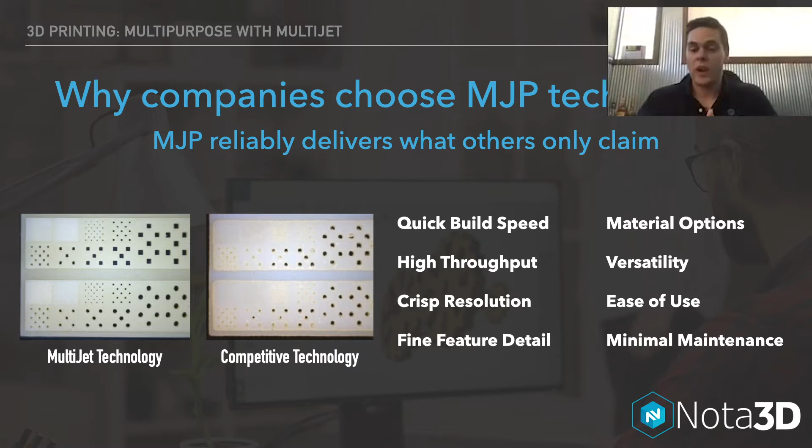Why do companies like to use MJP? Well, it's mainly because of the wide range of benefits that it provides. There's many reasons why companies would choose to use MJP, and if you were to ask our customers, the most common ones we hear back are extremely high resolution and detail, crisp corners and edges. A really big one is the no-maintenance print heads, easy material changeovers that don't require excessive purges and wasted material, and not to mention the wide range of materials available.

Based on having such a broad range of capabilities, MJP is usually a pretty good fit for a broad range of industries. Here to help me talk through some of the various industries we've helped over the years is Tom Rohrbeck. He's a longtime veteran of the additive manufacturing industry, having started his career with 3D Systems back in 1986. Over the years we've worked with pretty much any industry you can think of, but here's a few key ones we're going to dive into today. Tom, you with us? Sure, sure.

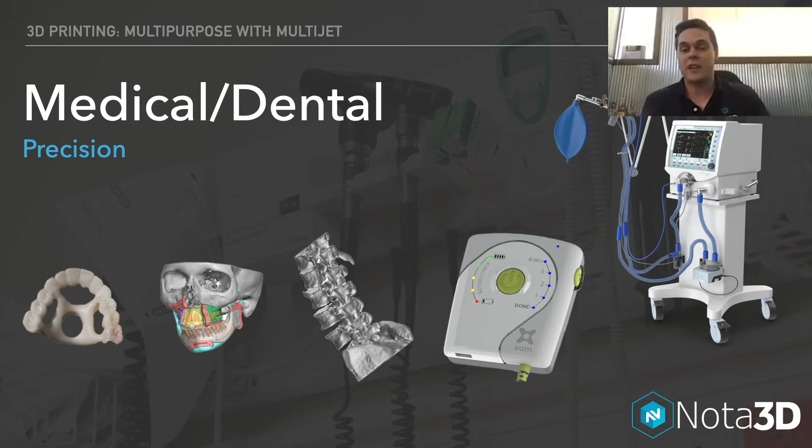One of our more popular market segments is medical. The medical industry really demands high precision parts, and based on the high precision of MJP systems, that's why they're bringing in MJP. Healthcare is probably one of the largest industries where we see MJP as a fit - from medical device companies printing device prototypes, to dental labs printing orthodontic models, hospitals printing pre-surgical planning models, and universities printing medical educational models. Another big thing is MJP offers a wide range of biocompatible and Class 6 certified materials, so those medical grade materials paired with high accuracy make it a great fit for the medical industry.

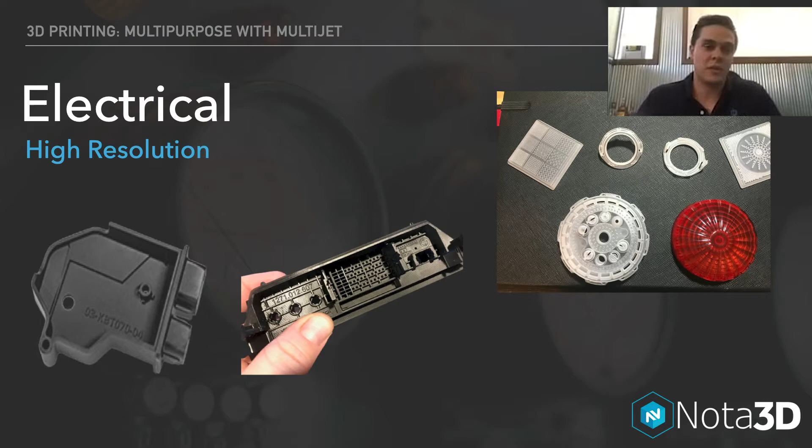We have a number of customers that fall within the electrical market, and what we find with our electrical customers is that they really require high resolution, high detail on their parts. Having that type of resolution and detail makes MJP another great fit for that. We also have some new materials that have come out, including a new high temp material, which has actually allowed some of our customers to wave solder printed components at 280 degrees C. That's also become a huge factor in companies using MJP for electronic prototypes.

Architecture is a very interesting market segment. We have a number of customers that used other processes in the past, but based on the easy post-processing with wax on the MJP, many of our customers in the architectural market are using that system.

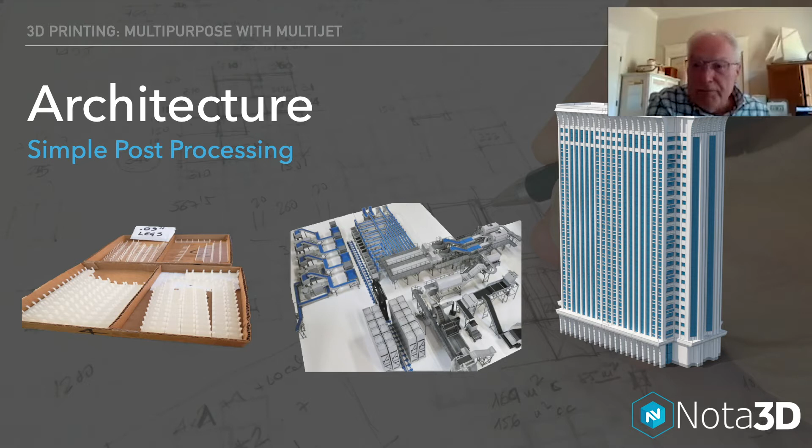Another thing to add with architecture - if you see the parts on the left side of the screen, you can't really tell very well, but we had a customer who purchased a 2500 and was printing a really large model of a skyscraper. She had to print all these little conference tables that had to go into the model. The resolution let us print these fine little legs, but also for post-processing, we had to print 105 of these. That could be a total nightmare, but we were able to print all 105 in one build - we nested it up. Since we used the support wax, which we'll dive into further in a couple minutes, we were able to batch build and then post-process this entire block of parts all at once. It made it very simple, and there was no damage to the parts, which is something very common with other technologies. That's been a huge factor for architecture, but we see that in a lot of other industries as well - being able to print big batches and post-process in big batches.

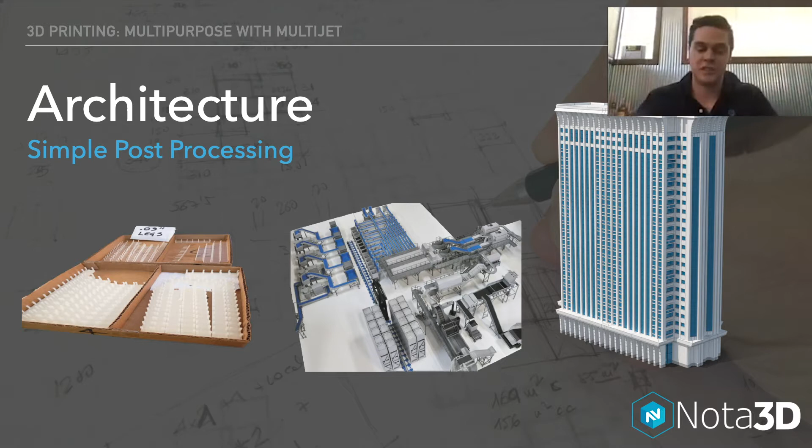They ended up choosing MJP because they were able to keep the high strength without having to sacrifice the surface finish, detail, and accuracy. So that was a huge win for them.

Consumer products is another really big market for the MJP product. These customers typically do lots of different geometries at all times, so throughput, speed, and versatility, with different material options, become a big part of their requirements. Since most customers have a wide range of products and projects, one or two materials isn't going to fit every project. Especially in consumer products, companies need a machine that can be flexible and offer different materials to meet their ever-changing project demands.

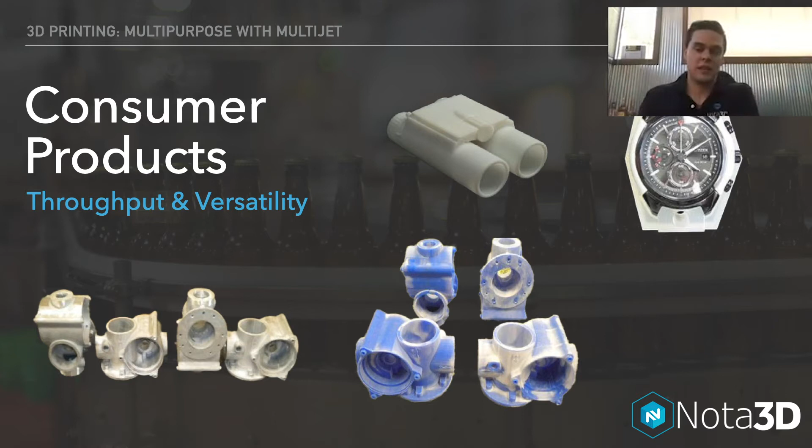So moving along, what exactly is MJP? How does it work? Some of you may have seen this before in the past.

MJP works similar to an inkjet printer you probably have at your office or desk. We load in cartridges of liquid material that get fed to a print head. The print head shuffles back and forth over the build tray. It jets out a model material and a support material. We use a wax support material that allows for easy melt-away post-processing and batch post-processing that I was mentioning.

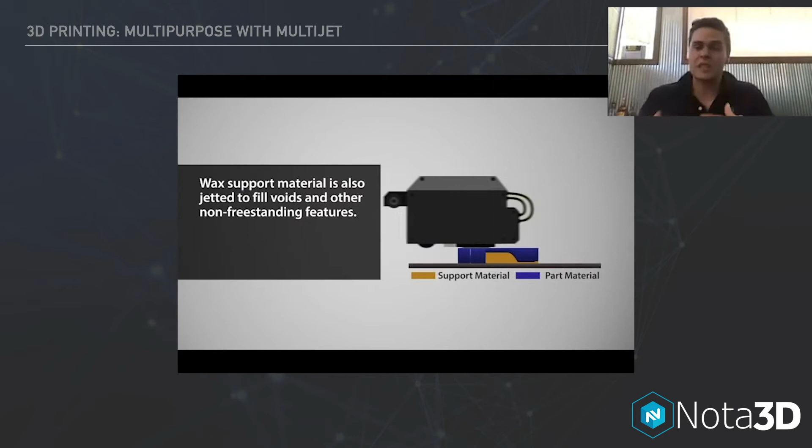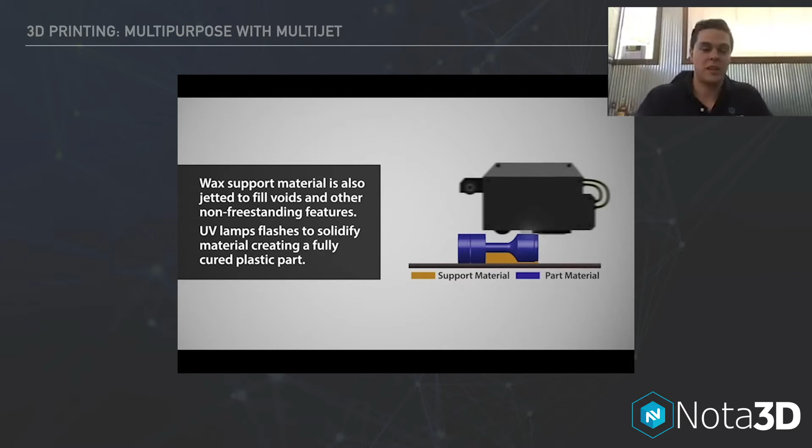We also use what's called phase change chemistry in our materials. We slightly heat up the material in the machine, and when we jet it, it's partially cooling and solidifying on the way down. So we can really control our droplets much better than the competition. That's how we offer such high resolution and really crisp detail.

Since it's unlikely that all of your projects have the same needs and requirements, it's really important to find a machine that offers material flexibility and a wide range of options.

We have engineering grade materials for projects that require functional testing of high accuracy parts. We offer high temp materials for high temp applications or even rapid tooling. We have standard rigid and elastomeric materials for concept and aesthetic prototypes. We even have a version of the 2500 that prints in true foundry wax for investment casting.

On our 5600, the large version of our MJP technology, that machine allows you to blend multiple materials at once. That gives you the ability to create custom blends and specific durometers, so you can tailor parts to your project needs.

One thing 3D Systems does really well is put a lot of time, money, and effort into developing materials and capabilities for existing machines. Our flagship machine, the ProJet MJP 2500 Plus, has been out for about 5 years, and we've added 7 materials just in the past 3 years to that machine.

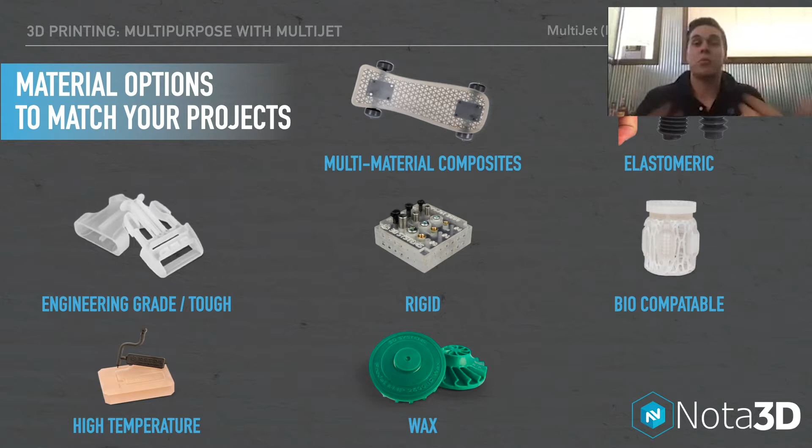If you own that technology, we just let you run it. We tell you, here's an update, and now you get to run this material. We don't charge you for a material package, or say, I know you bought that machine 6 months ago, but if you want to run this material, you have to buy the new one. So it should give customers a lot of confidence in making a purchase in this technology, that it's not going to become obsolete anytime soon.

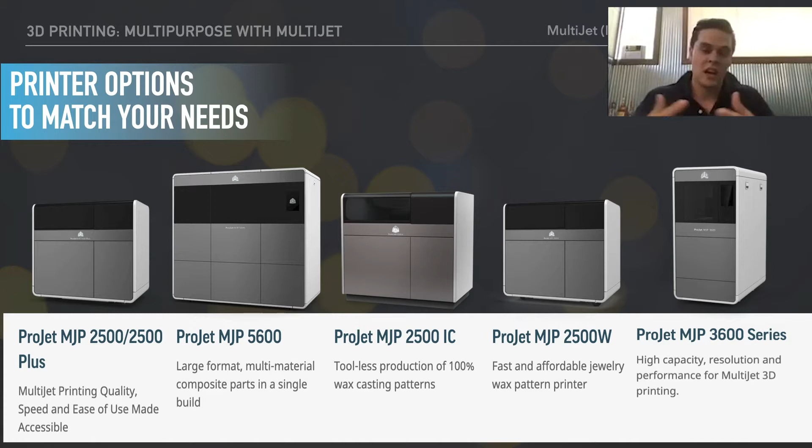So this is the MJP line of equipment. Between any of these machines, we're really going to have something that's going to meet your size and material requirements. And we'd obviously love to talk with you further about your needs to see if MJP would be a good fit for you. So please follow up with us after the webinar, and we'd like to dive into that a little bit further.

Now I'm going to pass it off to Joe Corbell to run through our 3D Sprint software. 3D Sprint is the software that comes with all of the 3D Systems machines, and we use it across all of our technologies. It's super easy to use and offers a ton of user control over their files. There's a lot of different capabilities within 3D Sprint, but for today Joe's just going to dive into a couple for you.

My name is Joe Corbell with Nota 3D. I'm the applications engineer. I'll be going over today the split function in 3D Sprint.

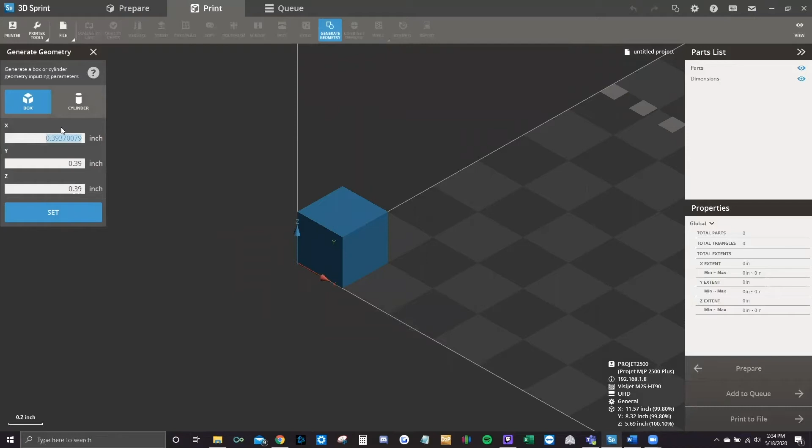To get started, we're just going to take a generated geometry that we can create right in Sprint itself. Let's say we pull in a part that's a little bit too large for the build plate, call it 12 by 10 by 5. That'll generate this large cube that we can see is clearly outside of our build platform, but that's what we want. So the software will automatically kick it off to the side, just because it can't print a part that big.

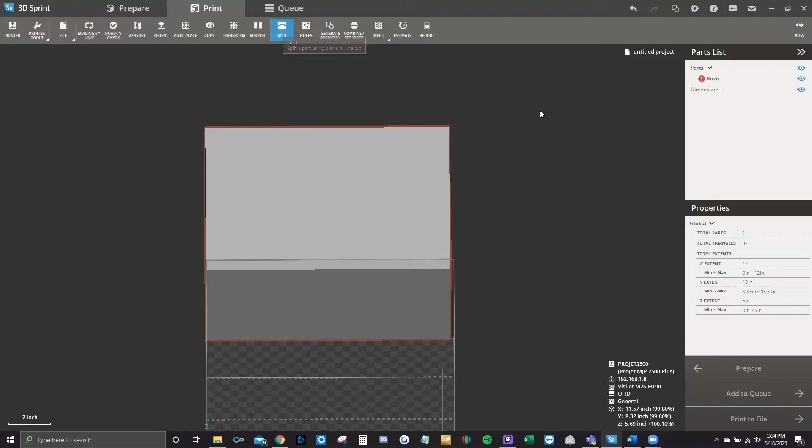So we're going to go into the split function that's at the top right here in the toolbar. Go ahead and click on that, and it gives us the option to cut on a plane or cut on a line.

We're not too tall for the build platform, but we are too wide, so we'll take the Y and Z split. We don't really need a clearance for these parts. The clearance would be if we had some sort of bonding agent where it would need to fill in a gap. Since we're not going to be using that, or the super glue we use is thin enough, we're going to keep the 0-inch tolerance clearance for that.

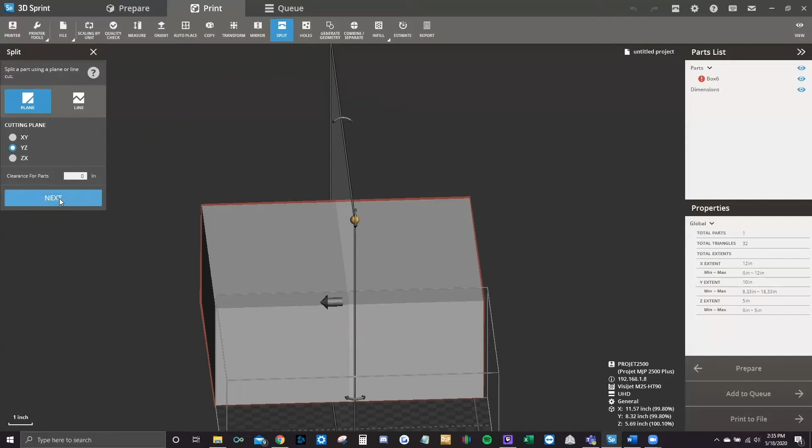So we'll click next. You can see that there's actually connector pins for this that are automatically generated. You can choose to turn those off, but for the sake of demonstration we'll keep them on. It'll help kind of line everything up as if we were actually making this part.

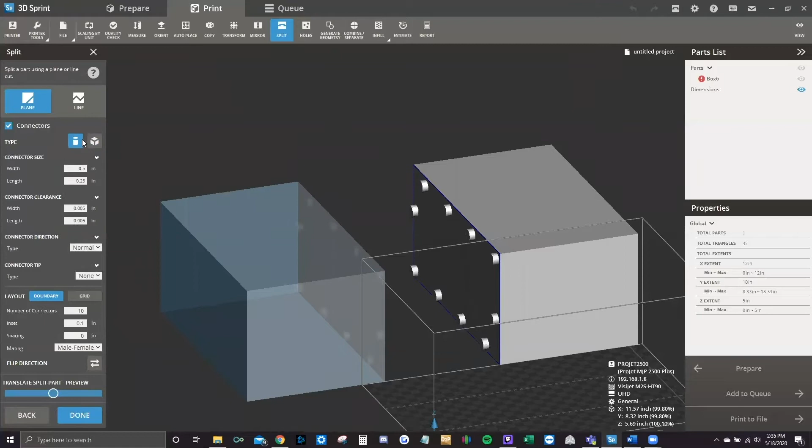So we can dictate whether or not it's going to be a box connector or a cylinder connector. We can dictate whether it's going to be a sphere, so rounded off, or a chamfer. And the smaller these pins get, the chamfer will go away, but the sphere function will still work.

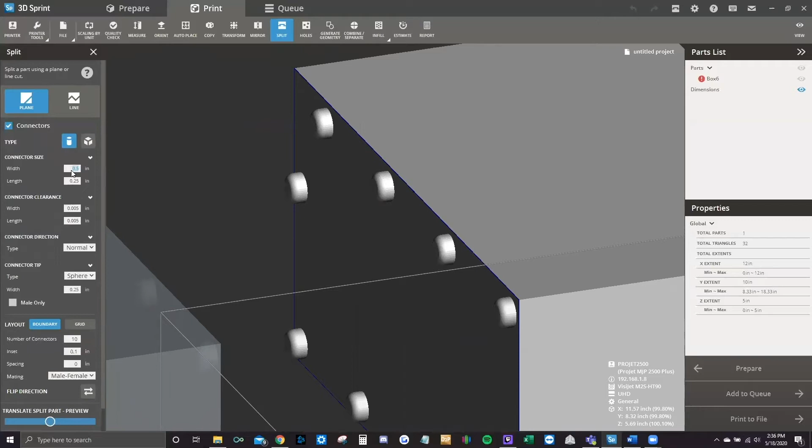So we can say, all right, we want to do 250 thousandths by 250 thousandths. That will give us our connectors there. We can choose to do the male only for the rounded off, kind of give the female connectors a bottom out.

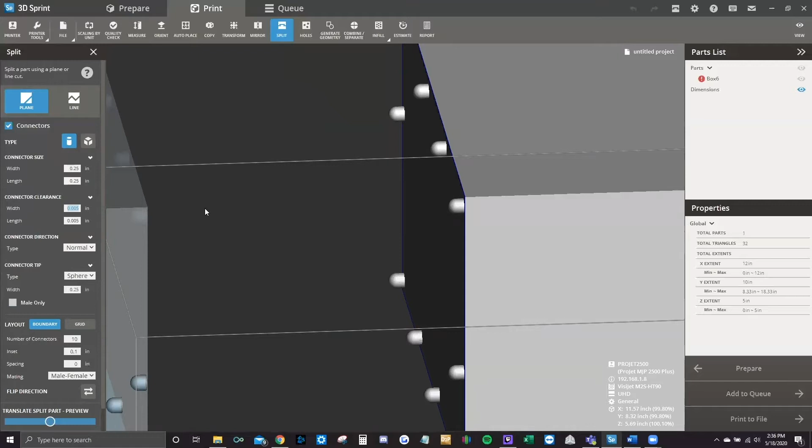We can choose the tolerance. Again, this will only be if you're using a bonding agent that requires more space than you would actually need in the part itself. So we'll leave that at 5 thousandths as a good guess, which will give us just enough wiggle room to line everything up correctly as we need to mate it.

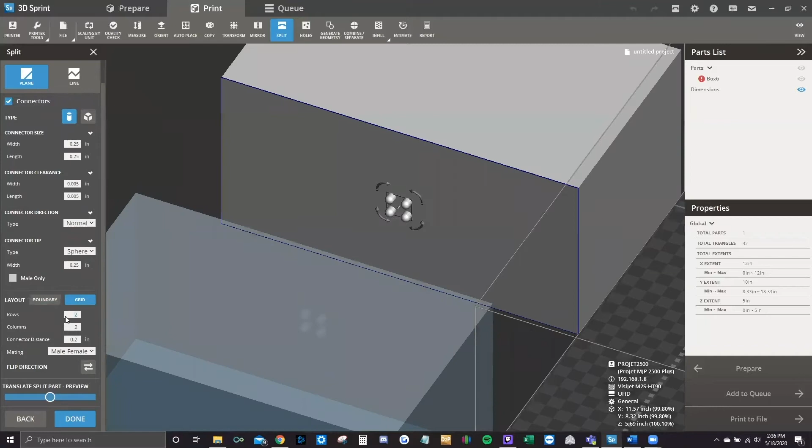Instead of letting the software dictate where all of the connectors will be, we can do a grid pattern. We can say we want 8 rows of 4. We can space these out differently, turn the grid, and line this up any which way we want.

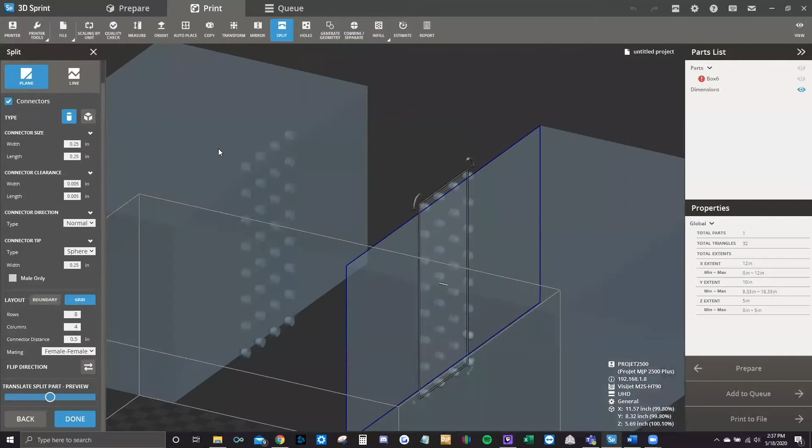You can do female to female connectors in case you had dowel pins or something that you wanted to connect in, so you don't need to use the connectors that come with the software. It's just automatically generated, so they make it nice and easy.

So we'll go ahead and turn that. We'll say done, and it gave us our 2 halves. What we want to do in this case is save off 1 half, because we're only going to be printing 1 at a time.

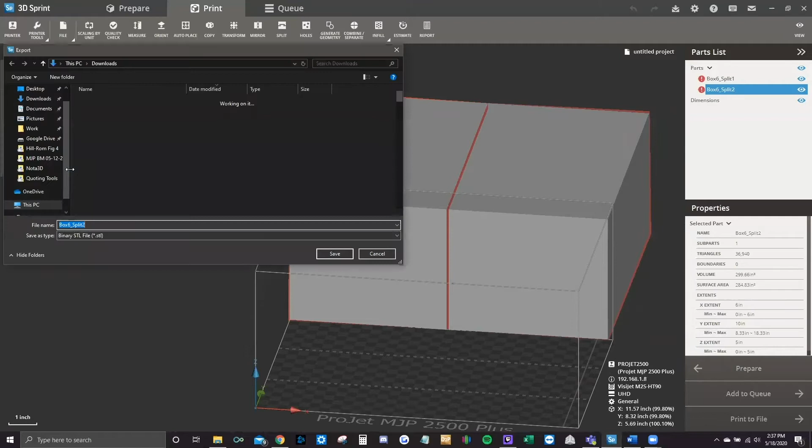So we'll go File, Export, and we're exporting the box split number 2. You can export as STL, CTL, OBJ, WRL, PLY, and AMF files. STL is going to be the easiest to work with, so I'll just export that out and save it.

Click out of that, and then we can go ahead and delete this out. So from here we'll just use our auto place feature, letting the software decide how to turn this so it'll fit on the build platform. And there we have it.

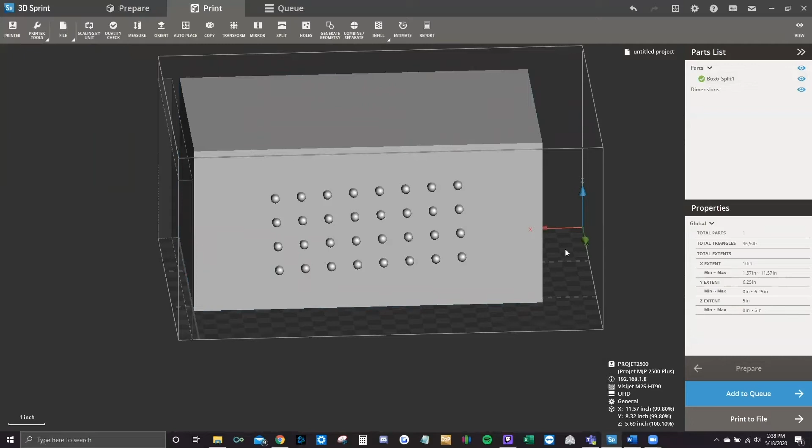So we would add this to our printer queue, and then we would load in the other part. We'll delete this one out as if we added it to the queue. File, Import, and we'll take our box 6 split 2. We have the same connector pins, auto place again.

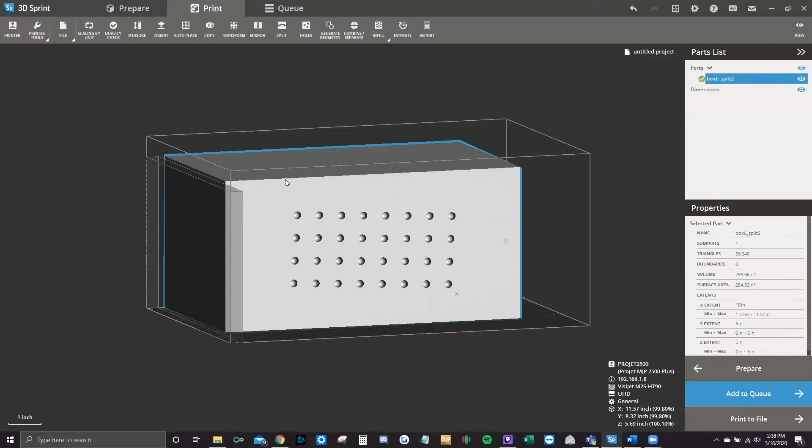And we would print this as well. So once this is finished, you would simply mate the parts together with super glue or use a UV curing adhesive. Really any number of ways you want to bond it—it's pretty simple to do.

But going from there, I'll generate another box. Say we have another part that's far too large. We'll say set. The other side of the split function is the line tool.

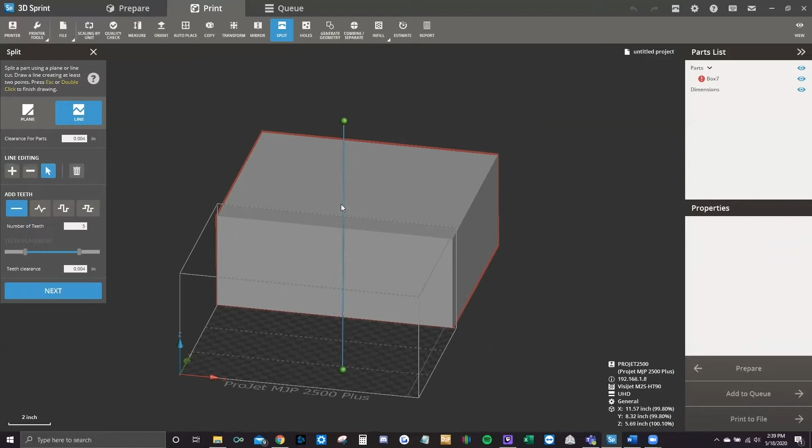So anywhere that you take a perspective view from your part, it's essentially going to slice it right down the center of that. Since we're not directly straight on and can't turn our camera, it's going to slice directly through this part. We can choose whatever style of teeth automatically instead of having to draw these out by hand.

So for the dovetail, we could add more or less teeth. They'll get smaller or larger depending on how many more you take. You can adjust the line from here as well.

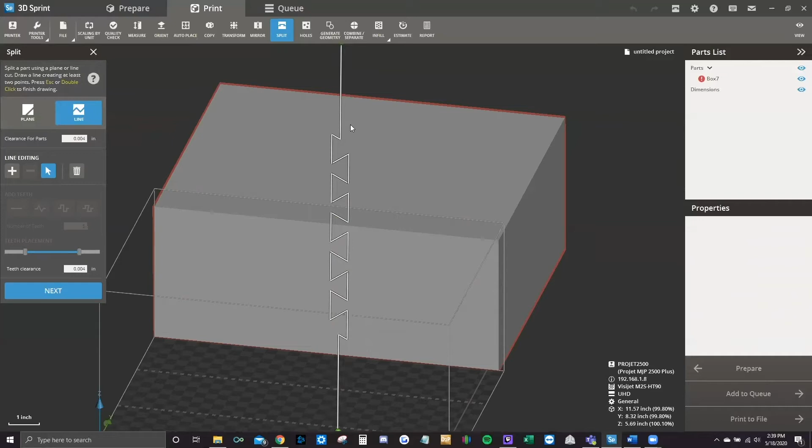You change the back end of it, make them wider. You can also add a clearance for these parts. Since we're not going to be using any bonding agent, we don't really need a clearance, but it might make it a little bit easier to mate together if we have a 4/1000th clearance there. So we'll go ahead and do that.

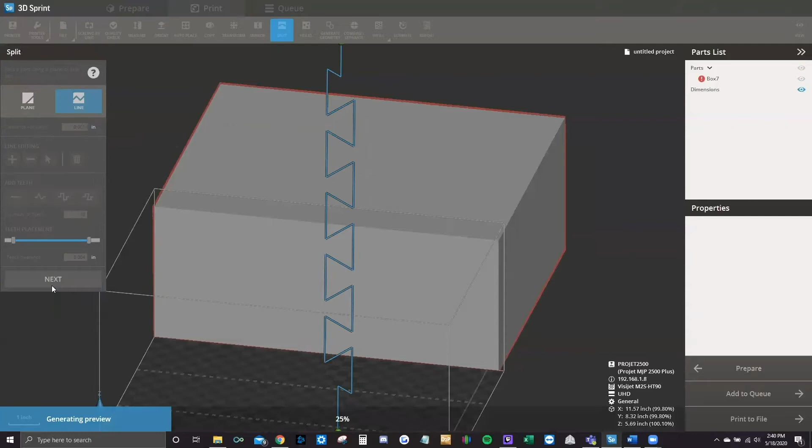Click Next, and it slices straight down the center of the part from where we had our viewpoint. We'll say Done. Again, we'll highlight our part, export it as an STL, and we'll delete that portion.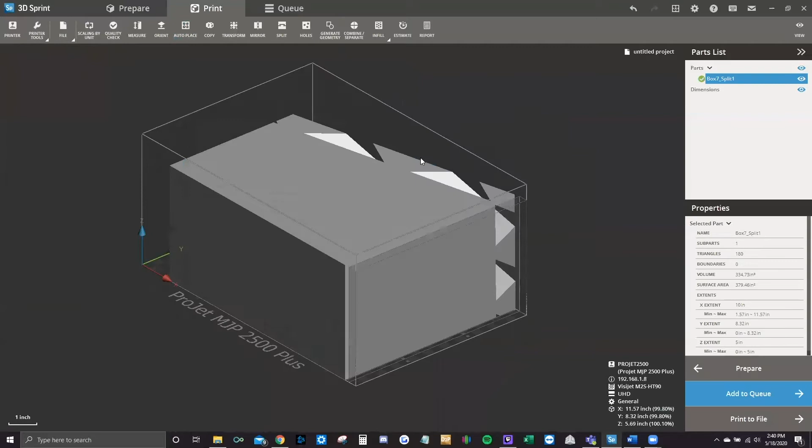Now we can see if this will fit by hitting auto place. It's outlined in blue—everything fits just perfectly. And we would add this to our queue, and again we would delete that out.

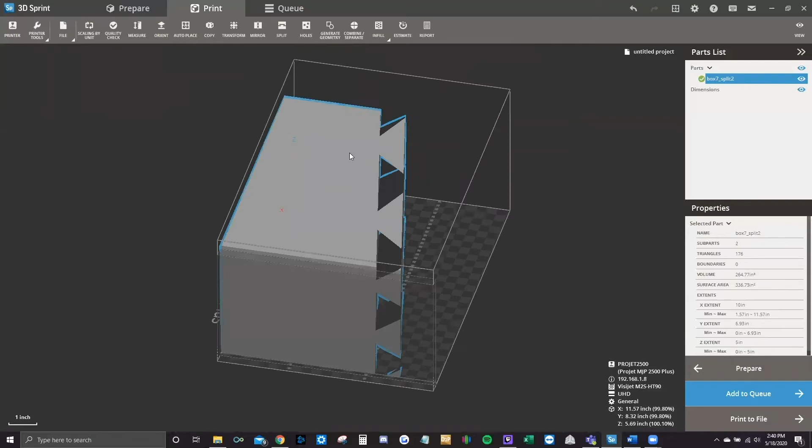Reload the split that we deleted earlier. Auto place and auto rotate. And we would add this to the queue as well.

So you can see down here, there is a little bit of a cutoff there, but if we're really careful and we take a different viewpoint, it's pretty easy to avoid that. So we would just add this to our queue. We would print both parts, slide them together, and lock them in place using the adhesive that we would need, and we would have our fully combined part.

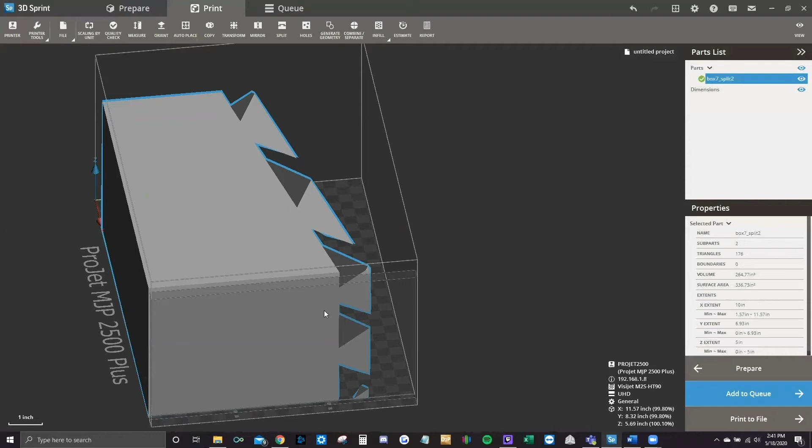That covers the split function. If there's any other questions or concerns, you can always go to the 3D Sprint help. You can type in split, and it'll help walk you through everything on this page.